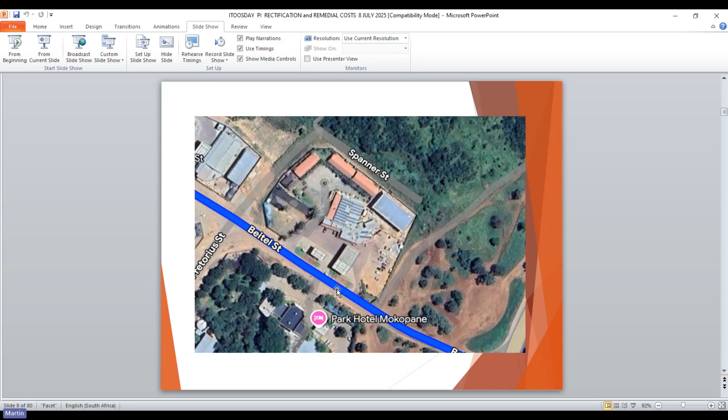This is a typical example - a filling station. This is a Google aerial view of it, with a little cafe, a little coffee shop next door, like you have at all filling stations. Our engineer was appointed to design the building and the foundations, but he wasn't employed to do the initial earthworks. So another party went ahead and did the earthworks.

They removed about 2 meters of material over the site, brought in fresh material, compacted it - watering it, compacting it - and put it into a level surface. Our engineer then designed the foundations, but he didn't go and check what they had done, because he says it wasn't part of his duty. Meanwhile, he's signing off for the foundations.

So we have a problem here with the duties of the engineer. We don't believe you should split those duties. If the engineer is designing the foundations, he must know what the existing material is, so he must be involved in the original earthworks. I don't think our engineer should come in almost on a part contract where another party has done the earthworks and he effectively accepts those earthworks by designing the foundations on top. So he designed the foundations and they built the building.

What's happened is that building has cracked up very, very badly, as you see. There's discussion now about what to do with this building - whether we knock it down or start extensive repairs. The building's dropped about 300 millimeters. It's quite a dramatic drop.

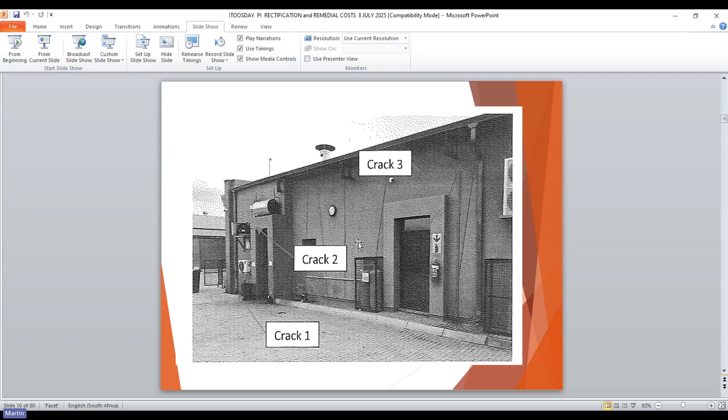During our investigations, we found the problem arises below those earthworks. When they did the original earthworks, which you see there, about 200 to 300 millimeters deep, underlying that is very, very poor material. So that poor material below the work they did there has failed and caused the entire earthworks and the building to go down. So obviously they're holding our engineer liable because he said, I designed the foundations.

This is the split responsibility we're seeing more and more, where they bring in almost a part contract - giving one part to one engineer and another part to another engineer. Really, the engineer must walk away from that type of thing and say, unless you give me the whole contract, I'm not prepared to sign off on foundations when I haven't done anything to do with the earthworks.

So you see the building is really settling down very, very badly indeed. This is an ongoing matter - we've just started this investigation. We have problems going forward. I can see it coming up that our engineer has signed off for the building, yet he was not involved in the earthworks. So there's a problem here.

Also, there's no limitation of liability. There was purely a quotation and acceptance by the two parties - no limitation of liability, really no details other than he signed off for it. So that's a problem we have with that.

Just a question, Martin. Please.

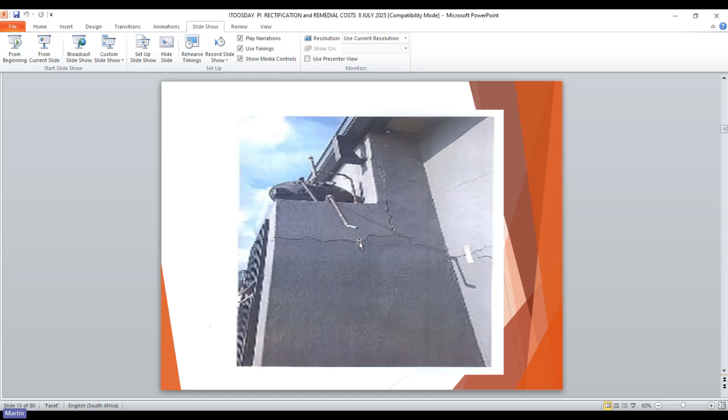That would be treated as remedial cost if this engineer has to place that claim. Absolutely right, I'm showing you quite clearly there. It's more than polyfiller and paint - this is in fact taking that building down and putting it back up again, which is between 3 and 4 million rand.

But here we have no contract. So tell me, what was this project value? Well, his involvement was 62,000 rand. And the value of the entire project? The whole project about 10 million, the building about 4. So he's going to be held liable now for 4 million, having only been paid 62,000 rand.

Okay, because he didn't enter into a contract. And we're having this more and more like this - he quietly says, I'll do all this work for 62,000. The client sends him a letter saying, okay, I accept your 62, go ahead. He does the work. Now, what is his liability?

He hasn't restricted his liability. And I think he has a problem here that he's signed off for the foundations. He's saying, well, of course, I didn't do the earthworks, but he's signed off for the foundations. So I think there could be a liability here against the engineer.

Really? Okay, so I really have this kind of problem now, and we're having it more and more, that they send a quotation in, there's a letter of acceptance, but nothing further. They don't go the next step and sign up a full contract between the two parties. I tell you why - because he says, well, it's only 62,000 rand. It is only 62, but he's going to be held liable for 4 million. So we really do have this problem.

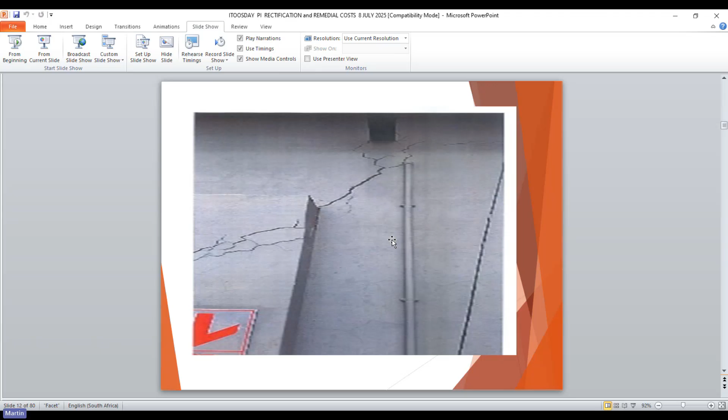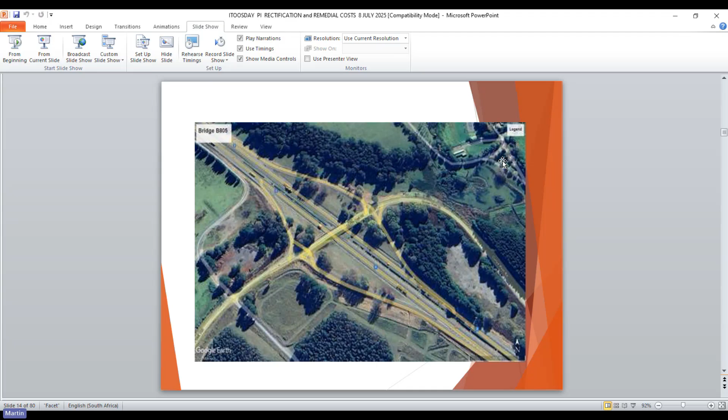Now, according to the driver, while he was driving, that crane lifted up. To our mind, that's not possible - that crane is hydraulically driven, and the truck can't move and operate the crane at the same time. You have to actually go to the back of that crane, disengage the drive to the truck itself, and engage the crane. So in our mind, it can't lift up while you drive.

So what has happened? Sanral obviously own this bridge - they're operating for the government, it's a government body. They got an engineer involved, and the engineer wants to demolish that section of the bridge, which is that beam across that one carriageway, take it down and put a new beam up. The problem is, this is on the N3 highway between Durban and Johannesburg - if you close the N3 highway, it's a major problem on its own.

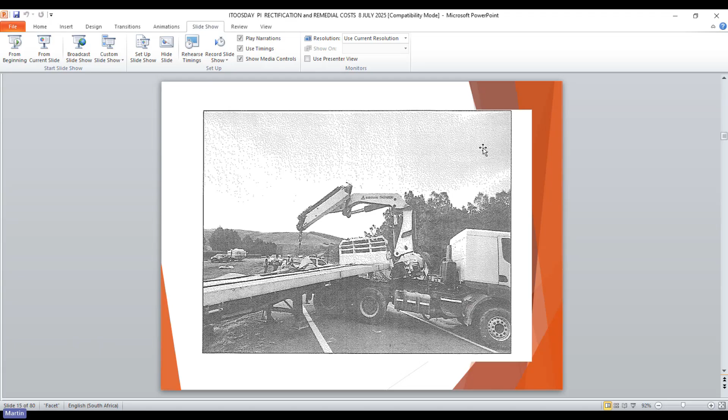So what's happened here with this trucking company? The trucking company only has liability of 2.5 million in their policy - that is their maximum liability, their maximum coverage. If we have to take that beam down and put it back up, it's about 8 million rand.

So really what the insurers are doing here is holding the hand of the insured. They say, we know you've only got 2.5 million, you're being sued for 8 million, we're prepared to help you out or look after you. So what we've done now, we've appointed our own engineers, our own team of engineers, and they've gone down there.

In conjunction with ourselves, we have submitted a proposal to Sanral to repair those beams, to take away that deformed steel and reinstate that beam back to its original shape. We believe, looking at the design, that it was over-designed originally. This is a very old bridge, over-designed way back 30, 40 or 50 years ago. We believe we can use that over-design to repair this bridge and give it back to Sanral.

That will save us, and bring the claim down closer to the 2.5 million, which he has cover under his policy for. The problem here is it's a Sanral bridge. Sanral can do what they want with the bridge, it's theirs. We can't dictate to them what they want or what they can do.

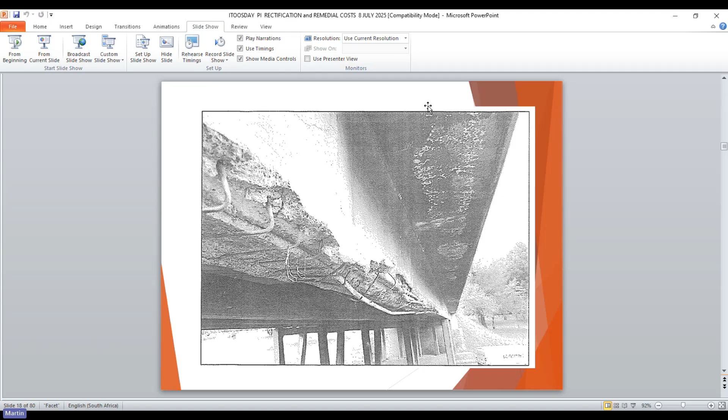So we put our whole proposal forward to SANRAL and say, we believe you can repair it for X amount, 2.5 million, we can repair this bridge, or you can repair the bridge and put it back to its original condition. SANRAL at the moment are taking a very back step on this, saying they've been told they have to demolish this whole section of bridge, and they may go ahead and do it and sue our insured for the 8 million rand. Whether that would then end up in a court battle to say you could have repaired it for 2.5, we're not sure at this point in time.

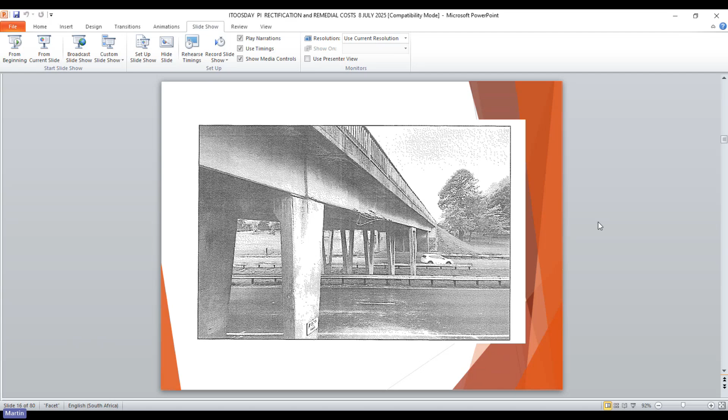But here's a guy who has 2.5 million. I don't know what coverage a trucker should take out, maybe 2.5 is a normal amount. I'm not sure, but certainly here it doesn't cover the damage. So this is what we're involved in at the moment. We've written to SANRAL, we're waiting for their response. We hope they say, come together, let's have a meeting and have the engineers sit across the table together and try to sort this out and get back to our 2.5 million sum insured.

So you've got an engineer, which is our insured, who designed that box culvert for the stormwater, and a separate design was then done for this reinforced earth wall. What's happened here is the reinforced earth wall is peeling away, it's breaking away. As far as we can see, that box culvert, or that open drain, is putting pressure on the reinforced earth wall and pushing it over.

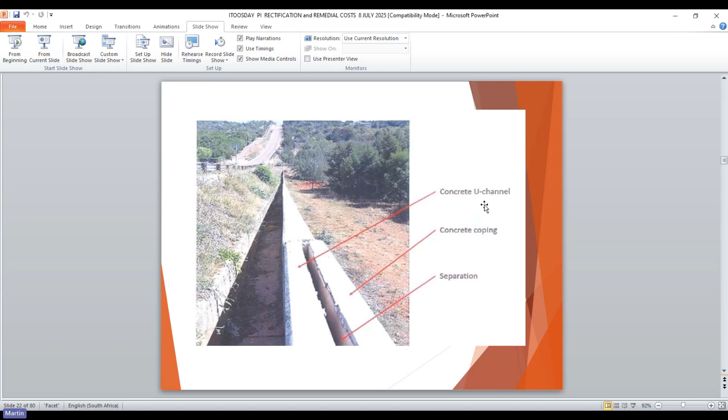They are saying to our engineer, our insured, your box or your open drain put pressure on our wall, causing it to fail. We are saying, as far as we're concerned, the reinforced earth guys knew that channel was there, they should have designed the wall to take the load of that channel. This is again the problem we're having, where you've got split responsibility between two engineers. One engineer designs the culvert for the storm, and the other engineer designs this reinforced earth wall. So who then picks up the responsibility when this thing fails? It's causing more and more problems now in a lot of our claims, where you've got more than one professional body involved in the claim.

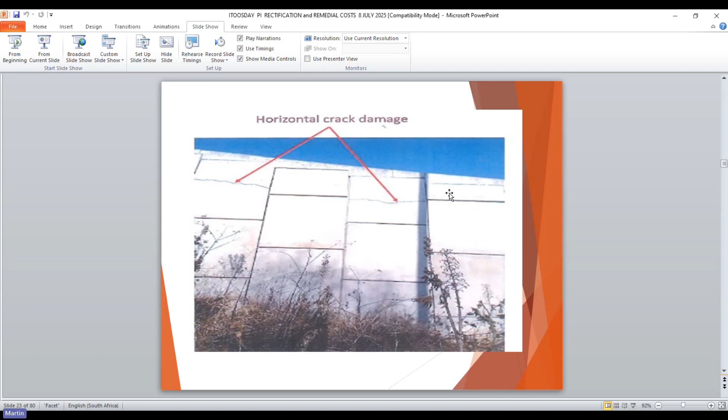Again, just looking at my note here, there was no contract entered into here. It's very, very annoying. Very annoying indeed.

Okay, I'm going to slightly, okay.

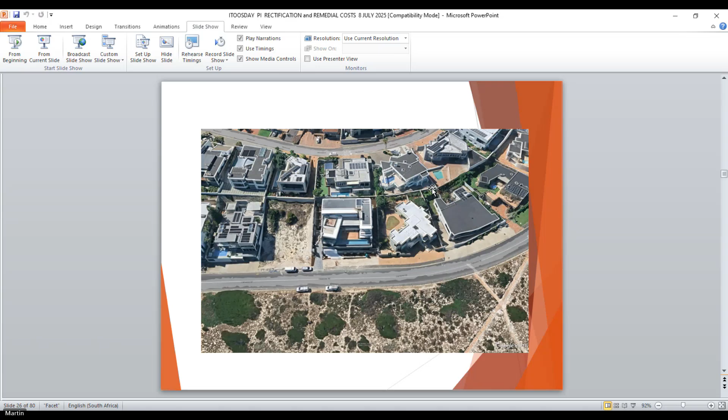Next one here is an architect. The architect was called in to design, this is a very fancy house you see there, down in Cape Town, a house about 33 million.

They designed a fireplace both in the lounge and in the upstairs bedroom, and went out to a specialist consultant who designs and installs these fireplaces. They installed it both in the lounge and in the bedroom. The very first time he used it, he'd been in the house about 3 months.

Winter started and he turned the fire on and it caused extensive damage. What we can determine is the person who installed that flue, on the right hand side, this kind of silver wires, incorrectly designed it, causing the woodwork to heat up and eventually catch fire. That fire was only on for maybe half an hour before it caught fire. Luckily, someone was there and it didn't burn the house down.

Our architect has overall responsibility. He signed off on completion of the project, beneficial occupation, final completion. The subcontractor who designed that flue was appointed by the client, a selected subcontractor. So initially they're looking to our architect to say, you have overall supervision here, you should make sure the subcontractor did it correctly, which he hasn't done. So they're looking initially to our architect.

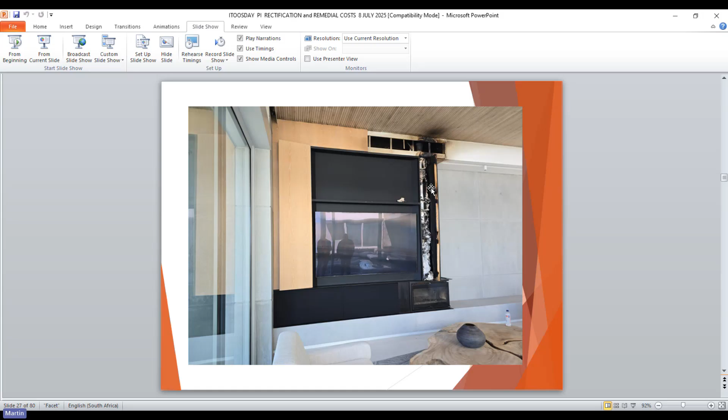In this particular coal mine, we put in 330 of these detectors for about 15 million rand. The coverage under the policy on this particular thing was only 5 million, even though he entered into a 15 million rand contract. What happened here is these circuit boards put into these units, 330 of them, were imported from China.

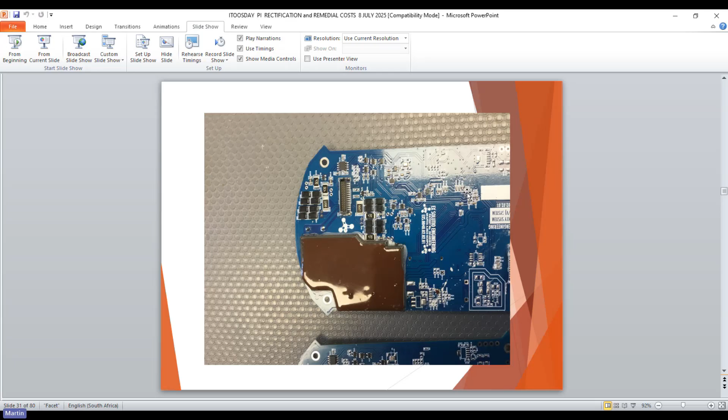When they arrived, this is how they looked. They looked fine, they were tested by our insured, he was happy with that. He then put what that brown covering is, an epoxy covering, because he was worried about the hot element of the circuit board. So he covered that so there would be no spark, no electricity at all coming from there, possibly igniting the methane. So we go ahead and install 330 of these units in the mine.

We install these in the mine and they start to fail. On the first failure, we removed that circuit board, but of course we can't access the chips because we'd now covered it with an epoxy coating. But what we can assume, looking back at that one, is that there's a fault in that circuit board supplied by the Chinese.

So what we've had to do here is go into the mine and one by one remove those 330 methane detectors, to be taken out and replaced in the mine. Replacement cost about 4 million. The problem being, he had a 15 million contract and only had coverage for a 5 million contract. That's what he said in his policy, he only does work up to 5 million rand. In fact, he had a 15 million rand contract here.

The mine were very accommodating. The mine said, we won't go against you for the closing of the section of the mine while you remove and replace these methane detectors. We won't go for you against that. But you must take all these out and replace them, for about 4 million rand. And the insurer said, you're way underinsured by 300%. So of the claim value of about 4.5 million that it cost to take out and replace these, the insurer settled for just under 300,000, and that was accepted by the insured. So the insurers paid out the 300,000, and the other 4.2 million they had to carry themselves.

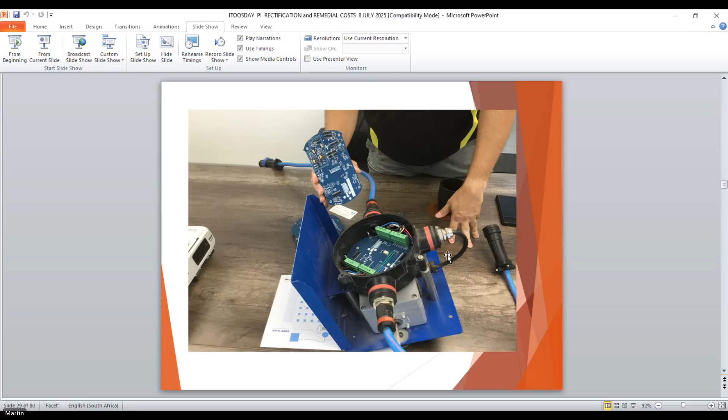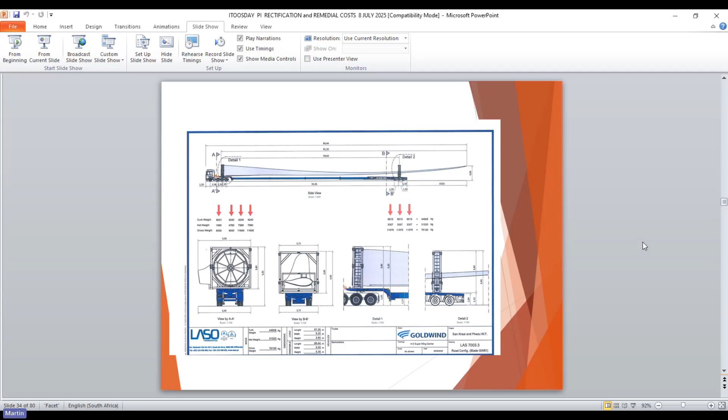The problem here is when the blade came along, it couldn't go around the corners. There were embankments in the way and they couldn't take the blade onto the site. So the blade had to be offloaded and left on the side while they changed the profile of that road. Our engineer had a limitation on the contract of 1.6 million, that was in terms of his PROCSA agreement, and that was signed by the client. The claim is about 12.6 million, to go there and widen these roads so that the blade can traverse down those dirt roads. At the moment, we haven't settled the claim.

The client is not happy, obviously, to pick up the difference between 1.6 and 12.6 million, but he signed the contract. As far as we're concerned, that is it. We're just waiting for final acceptance by the client that he's going to pick up that difference.

Sorry, this is Martin. Martin, yeah, go. Just on that windmill, was that a car policy or a PI policy? That was a PI. Okay, alright.

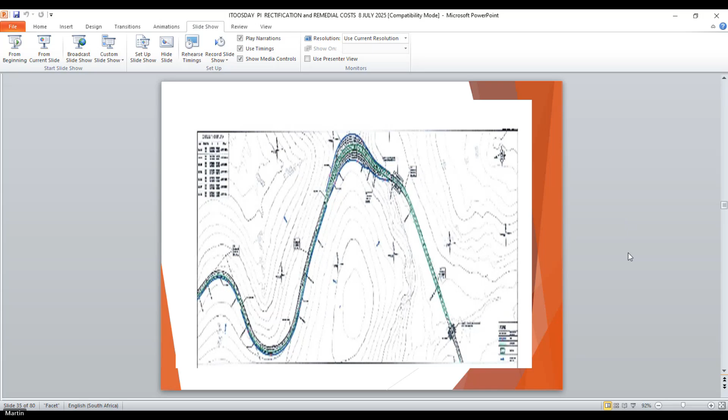This one here was also quite interesting. This was a piling contract in Johannesburg - piles going into the ground. These are concrete; they drill a hole, put steel in the hole, and pour concrete. I won't go into detail how you build a pile, that'll be another talk. So what happened here?

Our engineer designed the piling setup. You give a drawing showing exactly the position of each pile, because on top of those piles you're going to place your building. So you work out exactly where you want the pile, but the actual design of the pile, funnily enough, is not done by our engineer, it's done by the piling contractor. In a piling contract, you say to the contractor, I need a pile that can take 80 tons, and it's over to him to put in a pile that can take that load. We give him the position of the pile via drawing and say go ahead and do it.

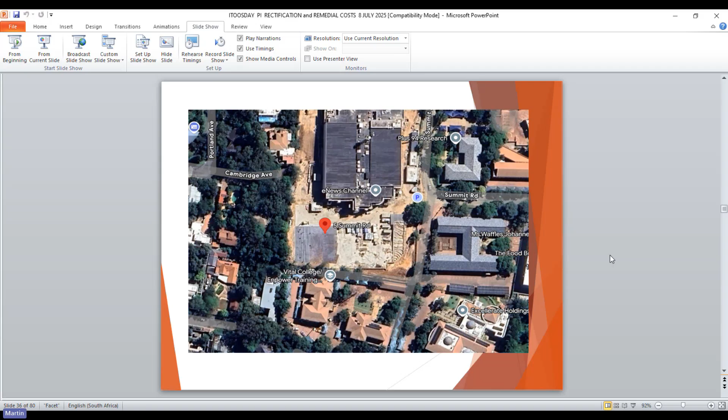They then set out the piles, put them in position, and the site was handed over to the contractor, who started putting the building on top. Almost immediately, the contractor got onto site and found that the piles were in the wrong place. On investigation, the drawings were incorrect - the drawings issued by our insured, our consultant, were incorrect. Because the piling contractor was still there, our insured said to them, go ahead, we'll give you the new piling positions and install the new piles.

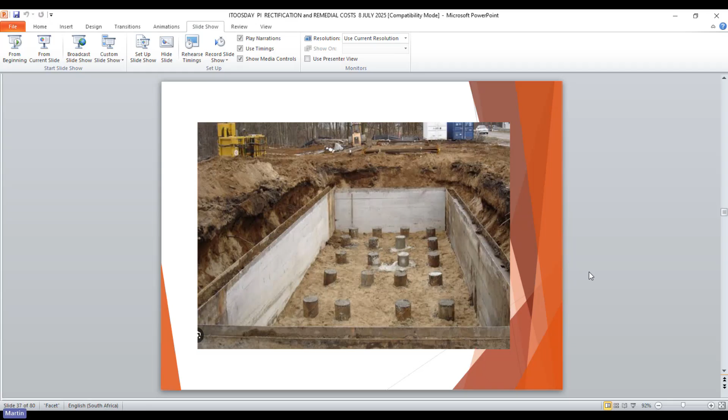The cost of installing those new piles was about 2.2 million rand, but it was much cheaper to do it there while all the machines were on site rather than re-establish the entire site. The problem was he never told the broker or insurer that a claim had arisen. They went ahead and installed all the new piles in the right position, discarded the old piles, and some weeks later informed the broker that a claim was being made against them. Insurers looked at this, and after a lot of debate said, although you breached the policy conditions, we're prepared to come to the party. The insurers paid out the claim to the client, even though it was late notification and the work was already completed.

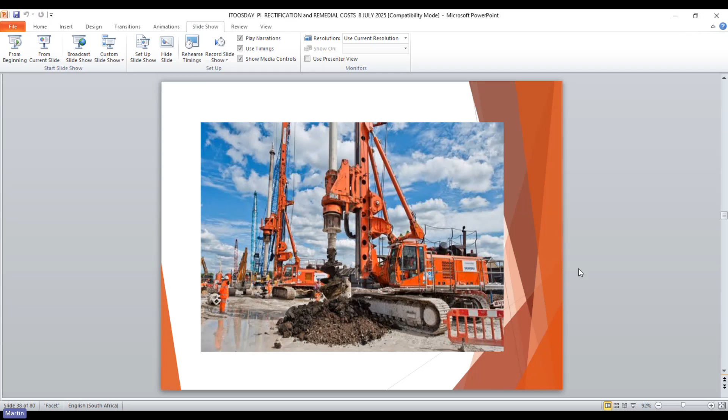You may remember that one, Susie. Yes, I do actually.

The claim here was about 32.8 million against our consultant. He had a limit of indemnity under the policy of 20 million. He didn't have a PROCSA agreement, so there was no limitation of liability. As far as insurance was concerned, the claim would be up to the indemnity under the policy, which was 20 million - what would happen to the other 12.8 million was not an insurance concern at that time. So the client, a government hospital, went ahead and gave the contractors the go-ahead to do all the repairs and rectification work on the whole building.

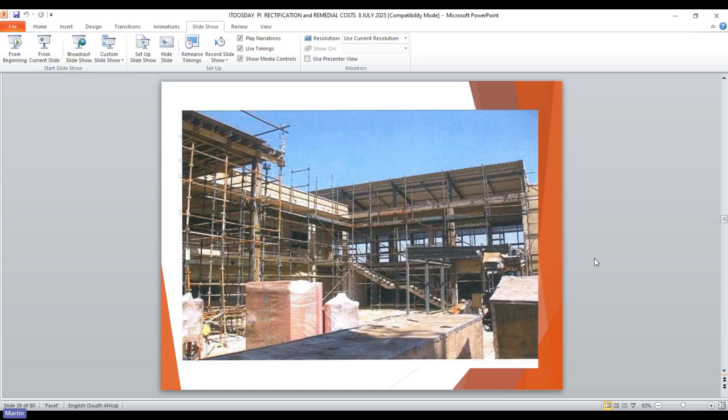What has amazed us is that they've incurred 32.8 million. The government, we have 20 million on the policy, but no one ever came and asked us for the money. It's quite an unusual situation. There were lots of letters back and forth holding us liable, but no one ever came forward and demanded 32 or 20 million from us. So the rectification work was completed and no one came knocking on our door, which is very unusual. So the insurers really walked away from 20 million.

Here we have, this is down in Durban, the ShopRite Checkers. This is a new warehouse. Following, if you remember, the riots in Durban - when was that? 2021, was it? Okay, well done.

Thanks, Susie. So following the riots in '21, ShopRite Checkers had a major problem with their insurers. Their insurers were saying, unless you put further security in place, we're not prepared to renew the policy. So they gave a contract out. First, they gave an order to our insured to design a 2 meter high wall - I do have one of the wall itself. This 2 meter high wall, reinforced etc., would then stop anyone coming into ShopRite Checkers.

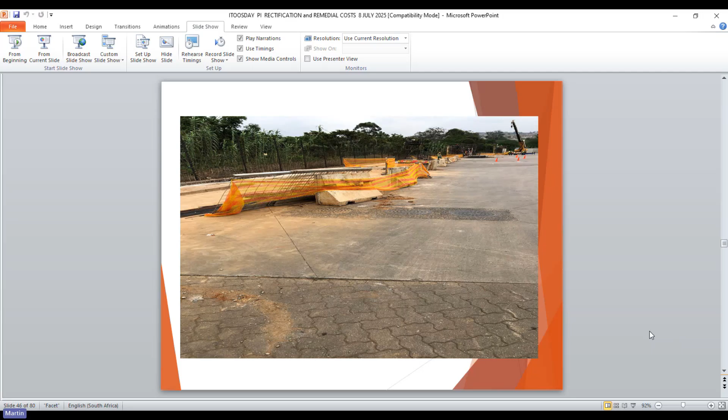What happened here? That wall, which had been built in the distance there, built by WBHO, was in fact built on a servitude. You're not allowed to build a wall on a servitude. So under this wall is sitting a very large water pipe and the sewer lines underneath. Now, why no one picked up that there were manholes all over the place, that no one saw these manholes, and yet they built the whole wall.

Now, ShopRite Checkers were very keen to leave that gap there because it was very convenient for them to get the trucks through and back into the loading area at the back. So after a long discussion with the Durban municipality, ShopRite Checkers agreed to take over all the piping in the servitude, for, I presume, forever. I didn't see the contract eventually reached between the two parties.

But what they're in fact saying is that any failure of those pipes, either the sewer pipes or the main water pipe or anything, ShopRite Checkers will rectify whatever happens. And that gave them an extra 2.5 or almost 3 meters of space, which allowed trucks to go around the back of the building. So the claim against our insured at the time was something in the region of 5 to 6 million rand. In fact, because ShopRite Checkers took over those pipes and left the wall where it is, no claim arose out of this situation, which is also quite unusual.

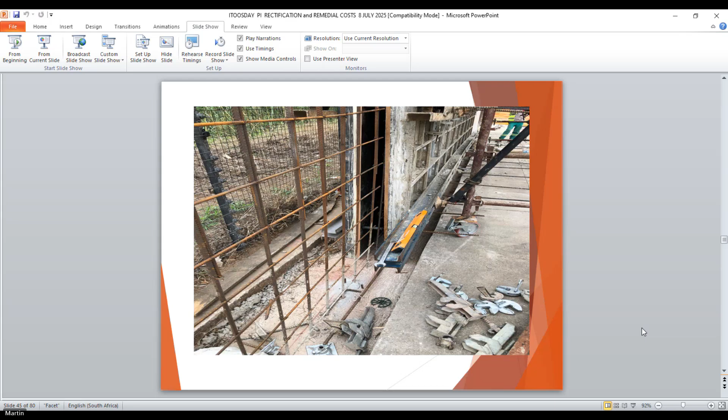Our insured here is an engineer who just checks. What happens here, they put this racking up in warehouses, and they're meant to take a certain load - 20 tons, 21 tons are meant to be taken on these frames. So his job is to come out once it's all erected and sign off, saying they put it up correctly, the bolts are in the correct position, everything is correct, I'm happy with it, and he signs it off. And that's what he did.

But the owner said, I'm not prepared to accept any of these goods, none of the food, nothing at all. I'm going to scrap the whole lot, which I think a lot of this food or these goods could have been given out, certainly not just thrown away. But then he made that decision, not our decision, his decision. So he incurred costs of about 25 million, and he sued our engineer who signed off that racking.

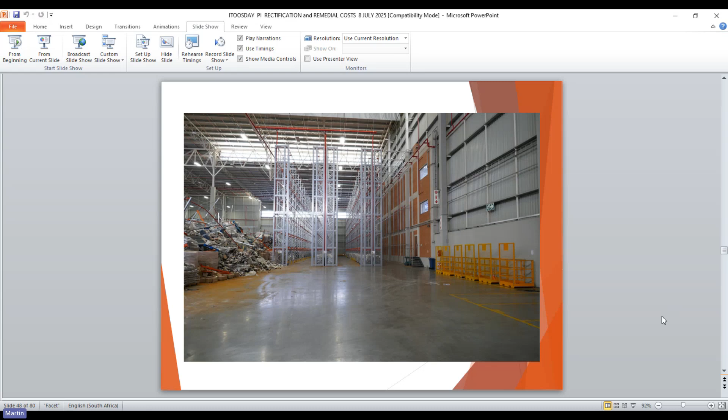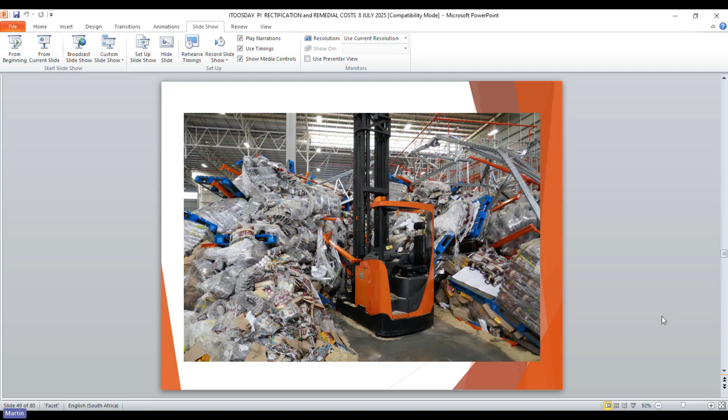So what happened here is that they held our insured liable, but they couldn't tell us why it fell down. I think we pretty much know why it fell down - because the cameras weren't working, so that's self-explanatory. This whole case collapsed because they could not show why it fell down, and we know why - one of these little things hit the legs, and the whole lot came down.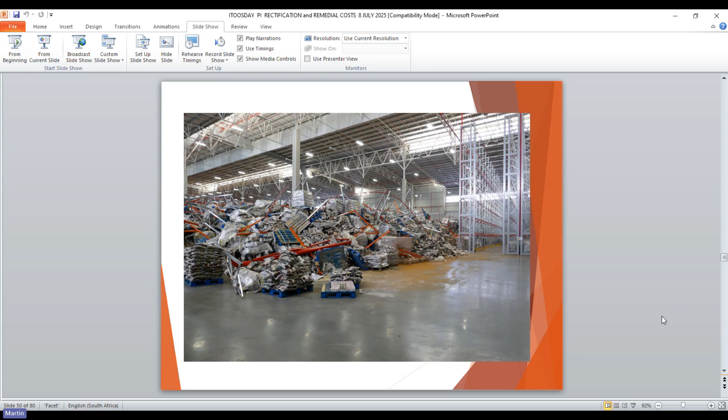I still think, if you look on the left-hand side, those are still on the pallets, still wrapped - that can be given out to a lot of people. Those were huge bags of rice. Now, that rice could be given away, but that's a separate discussion.

Okay, let me go forward. Here's one here which is an interesting one, and it addresses what you just asked. These are student accommodation. Now, I don't know about your student accommodation, but mine didn't look like this, I can assure you. But anyway, this is student accommodation.

And this was down in Cape Town, as I could imagine. Our engineer designed this - you look underneath, that is a garage underneath for our students' cars. I can imagine what they drive, because they can afford this. But anyway...

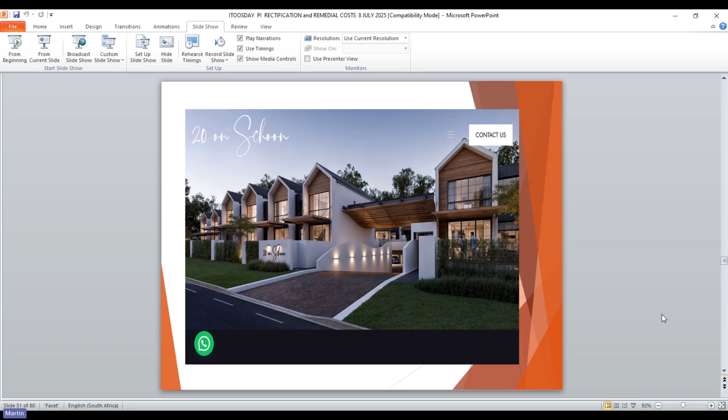So on completion, our engineer went down for the final sign-off, and they issue what you call a beneficial occupation certificate. Only once you give a beneficial occupation certificate can you, in fact, occupy the building. So in December, we go down there, we check everything, and we see there's some very severe cracks in the slabs supporting the building. We go back, we do a design check, and we found, in fact, we are 60% under-designed on our reinforcing steel.

What happened here is that an engineer did the design. It was signed off - it has to be - by a Pr Eng, a professional registered engineer. He didn't check the design, he just signed it off, which was wrong, obviously. He should have gone back and checked the design. He didn't do that, he just signed it off.

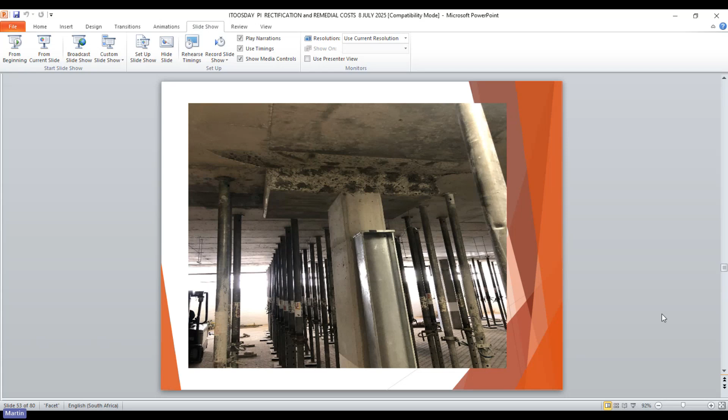So here we're faced with a rectification cost. All these steel beams you see here are to hold up the building after the cracks were found - these are new columns, new steel beams going in, all to hold the building up because it was under-designed. So the question you just asked is interesting here, because we're looking forward to what's going to happen. The repair cost here is about 10.5 million rand to repair this.

His limitation of liability is 2.5. So we said to the client, you've entered the contract, the maximum we can pay out on behalf of the client is 2.5, and that's it. The developer is not accepting this, even though he signed the contract. He's not accepting that he's limited his liability to 2.5. He's taken this matter further, and it will likely end up as an arbitration or court case, more likely an arbitration in terms of the contract. So he's not accepting the limitation of liability, and this is the first one we've had where the limitation has not been accepted.

It's going to be very interesting how this pans out. If this goes against our engineer, it puts the whole agreement into question, because if you limit your liability, the client accepts that limitation, but then it's overruled. I'm not sure how we'll go forward on it.

So yes, certainly, 10.5 compared with 2.5 limitation of liability. That's a typical example where we would normally pay out the 2.5 and the client would take the remaining 8 million as a knock on the chin. He's saying, I'm not prepared to accept that, I want the whole 10.5 paid by the consultant. The consultant can't afford 10.5. When we pay the 2.5, he can't afford the 8 million.

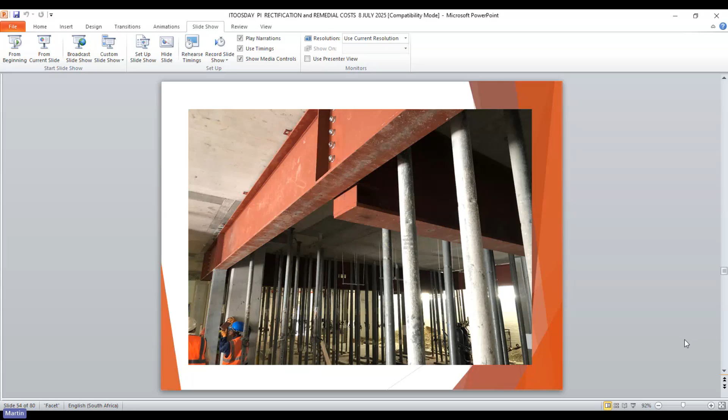So what's he going to end up with, his wife and kids? I don't know how he's going to sue him when the money's not there, but we'll see going forward. That's going to be a very interesting matter, how this one pans out, and we'll be watching it closely, because all these contracts will come into question if they rule against us.

This is one you just asked about. This is 3 buildings going up in Johannesburg. These are apartments, ranging in size from 25 square meters up to about 80. I went to a 25 square meter apartment, and it's quite small. In fact, it's very small.

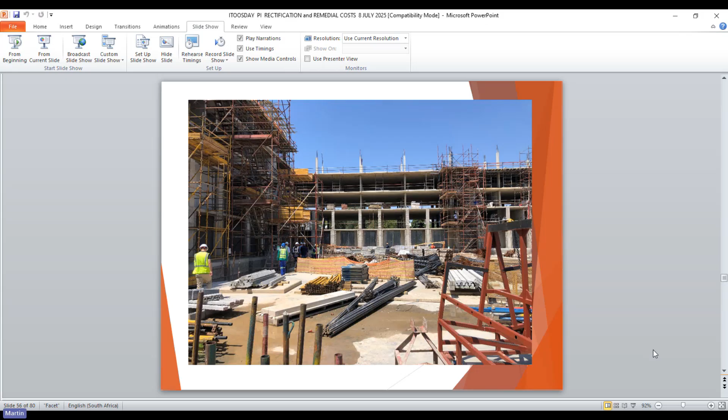But anyway, here we've got the situation where the contractor had reached the point of putting 2 floors of basement in for parking, and was up 4 floors above ground, when they started noting severe cracks in the building. Because of the severe cracking, he had to prop this building from end to end, the entire 2 basements, and some of the ground floor was also propped up because of these severe cracks.

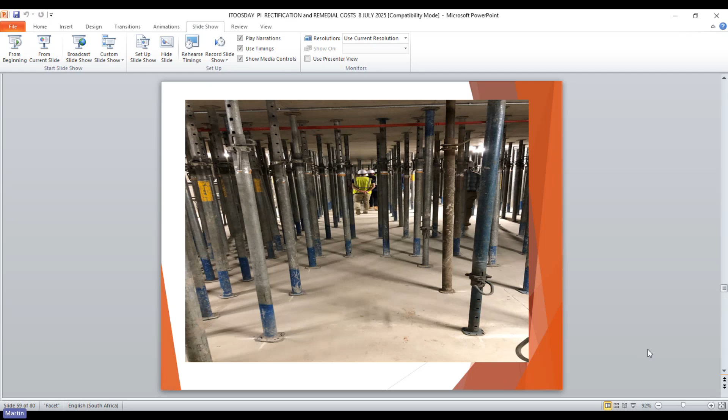So he was way under-designed on all the steel, the columns, etc. Because of that, we had to put 54 additional steel columns in. Here are the steel columns - we've got 54 of these in place to hold the building up.

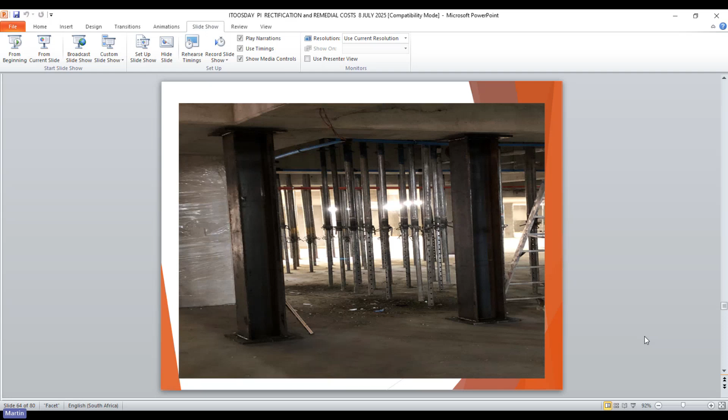We didn't like this design, so we had it double checked again, but by that stage they were well advanced in the remedial work. There were other ways of doing it, but the cost of the remedial work was 120 million to repair this building. The cover under the policy gave them 100 million in proceeds. So regardless of the change of design, we couldn't get the remedial work below the 100 million covered by the policy.

So we accepted, even though we didn't like the remedial work design, we accepted it, and the insurers paid out the 100 million in terms of the policy. The other 20 million was carried by the client. This client has not said, I'm not prepared to accept that I've got to pay 20 million in.

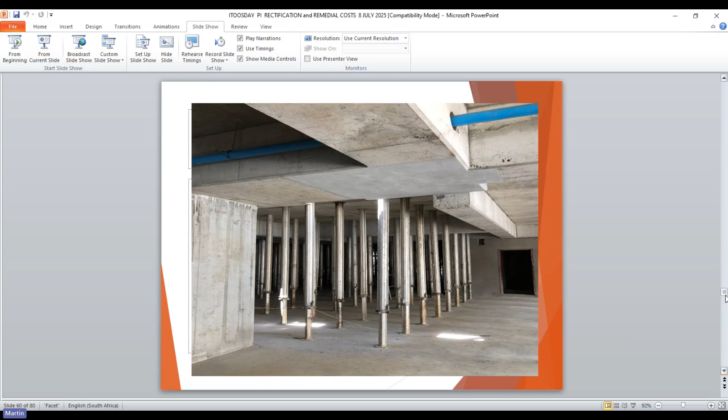He's accepted this one. The previous one, he's not accepted. He's in fact taking it. He's appointed attorneys already. The insurers have appointed attorneys now to look after the engineer. And we'll see how that pans out. I'm not quite sure how it'll go. I don't know. It'll be very interesting to see. There's a lot more legal brains on the other end of this call than me who will tell me that would work or that wouldn't work. I don't know.

This is a pedestrian bridge, also in Johannesburg, and our engineer designed this bridge. This bridge was made in 3 sections off-site and transported to the site and erected.

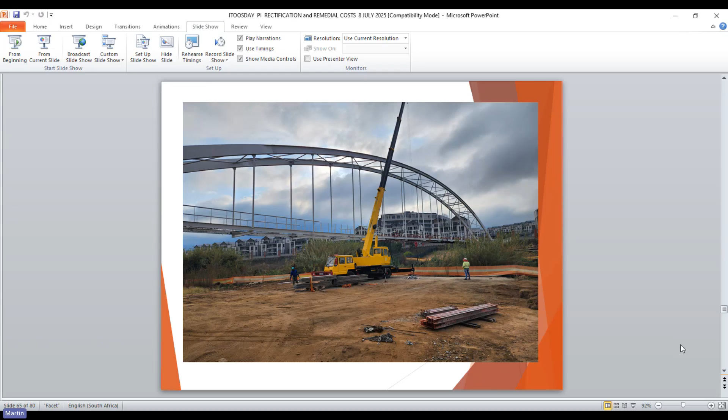We were very clear on our drawings. That's the concrete block on the ground, or the thrust block, or the foundation on which the bridge is supported. And those steel plates have to be grouted. So you position them, you adjust the bridge, you get the curvature of the bridge correct, and once everything is in place, you then grout that up. You push in cement and sand mix between the plate and the concrete, and that in fact locks that in place. That was not done.

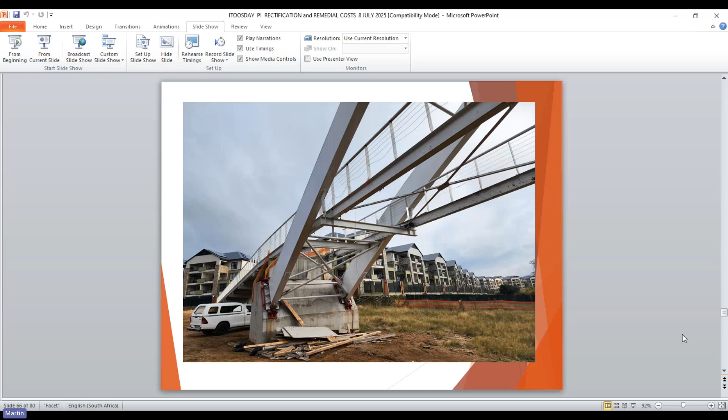So when they poured the concrete for the deck, that's what happened to the bridge. It all deformed very, very badly, went all over the shop. And they've held us liable as the engineer, even though the contractor didn't do what he should have done by putting the grout in. They said your professional duties included supervision. You should have supervised and you should have known that grout was not in place when they were going to pour the concrete. You should have stopped them. You should have let them put the grout in, then let them pour. So they held us liable as the engineer.

We had a very long discussion. They wanted to take this away, take it back to Springs and remanufacture this bridge. We said you could repair it in place. So there's a lot of dispute. The initial claim was 12 million, which was to take that down, take it back to Springs, reassemble it and bring it back again. We eventually reached agreement after almost a year of arguing that we will give 2 million and that in fact could be repaired in place. And that's what we've done. We've settled for 2 million, which was within the sum insured, and this matter has now been settled, thank goodness.

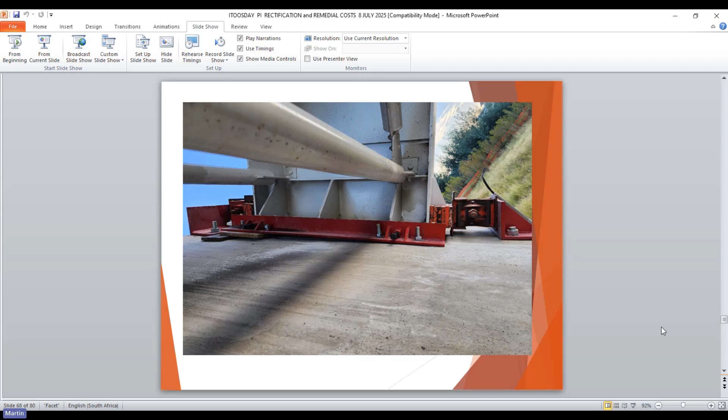Perfect. Thanks, Martin. Before we go to closing comments, I just wanted to ask, do you see more claims on rectification cost or remedial?

Rectification costs at the moment, where we're going now. It's just, not to harp on about it, but really, more likely the broker rather than the insurer. The broker's really got to look at what their client is entering into. What contract are they entering into? I know the brokers can't comment on the contract per se, but I think to at least say what contract, what is your limitation? But so many of these are going in with no contract, and it's really a big problem. These really a big problem.

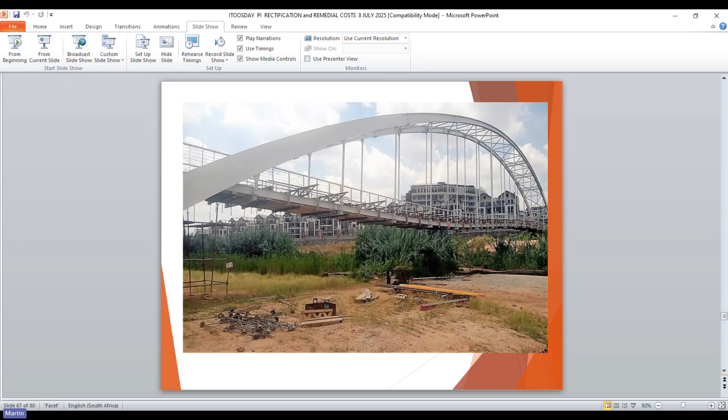Well done, guys. Well done.